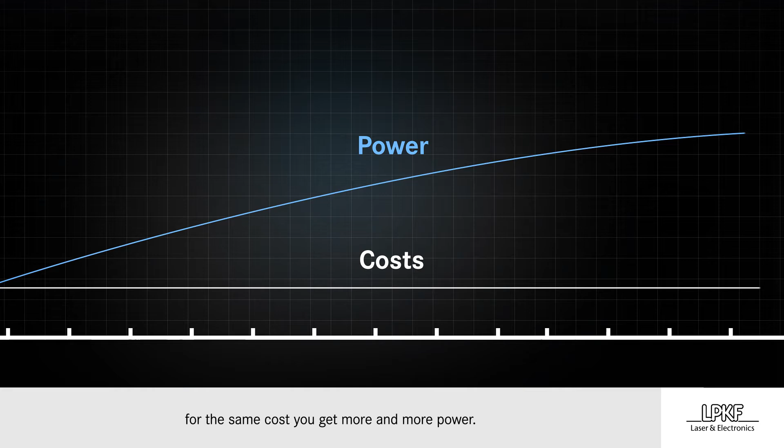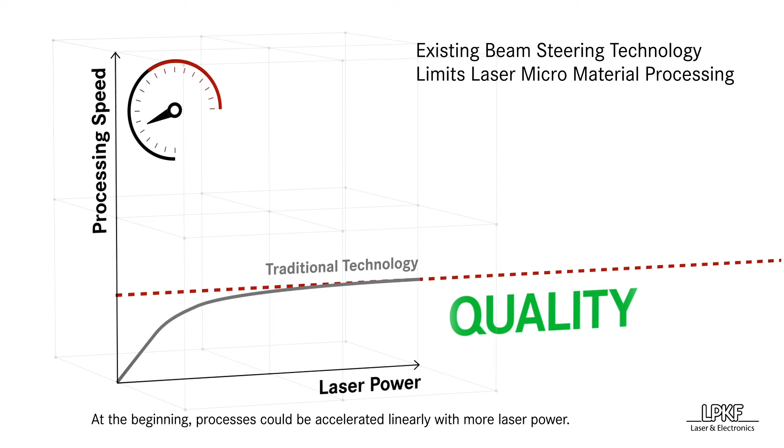Looking at the development of laser sources, we see that for the same cost you get more and more power. This is great, but the problem with more power is finding a way to use it meaningfully. At the beginning, processes could be accelerated linearly with more laser power. However, this is no longer possible without losing quality.

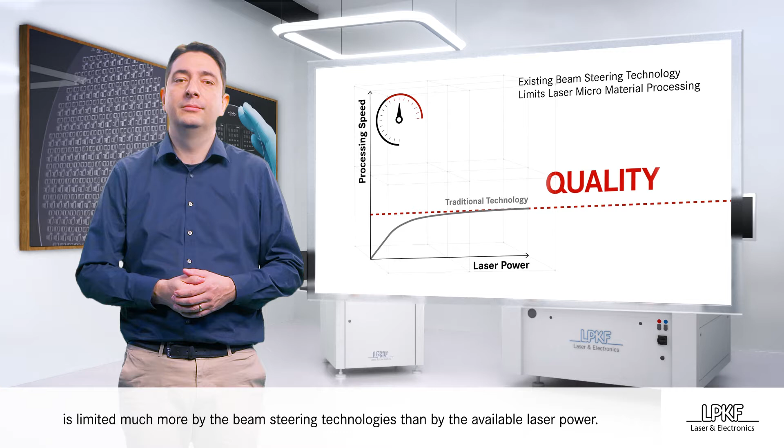We have reached a point where the actual processing speed is limited much more by the beam steering technologies than by the available laser power. This is exactly the point at which the Tensor-Technologie gets into action.

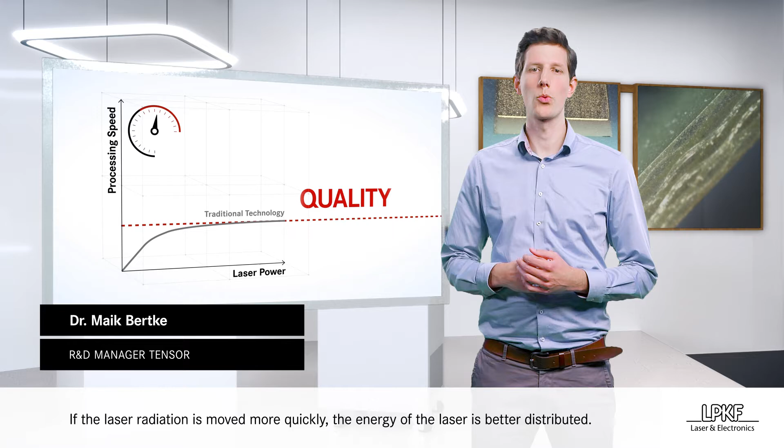The solution is relatively straightforward. If the laser radiation is moved more quickly, the energy of the laser is better distributed. Heat accumulation as well as losses in quality are less likely. In other words, you can operate with much more power before these effects occur.

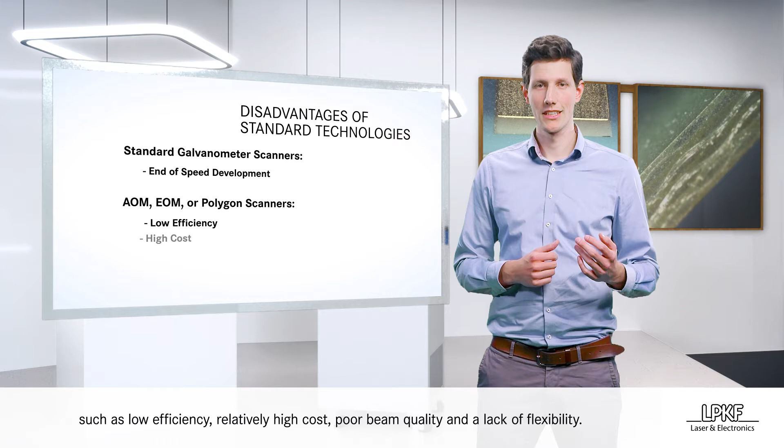However, faster beam steering is easier said than done. Standard galvanometer scanners have reached the end of their speed development. All other approaches, such as AOM, EOM and polygon scanners, are associated with considerable disadvantages, such as low efficiency, high cost, poor beam quality and a lack of flexibility.

We have long dreamed of implementing our Tensor concept. Thanks to our LIDE technology and in-house manufacturing infrastructure, this dream has finally come true. Our highly flexible development capabilities enabled the implementation of this beam steering system in record time.

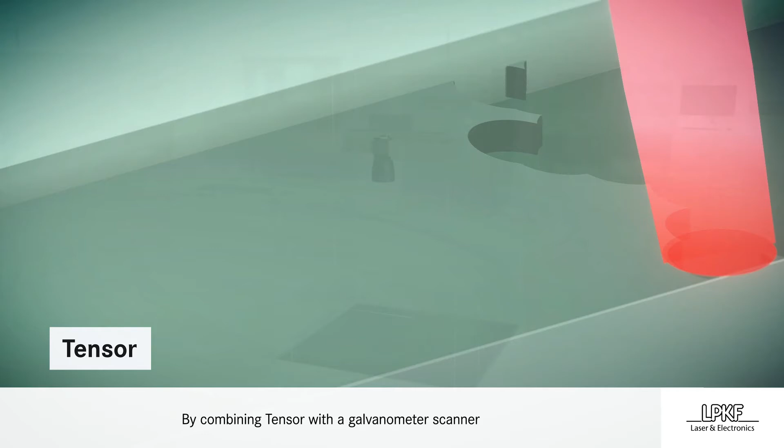Tensor overcomes the technical limitations of conventional solutions. It can be integrated very easily into different systems and adapted to various applications. By combining Tensor with the galvanometer scanner, we can achieve much higher speeds of beam steering without losing any flexibility.

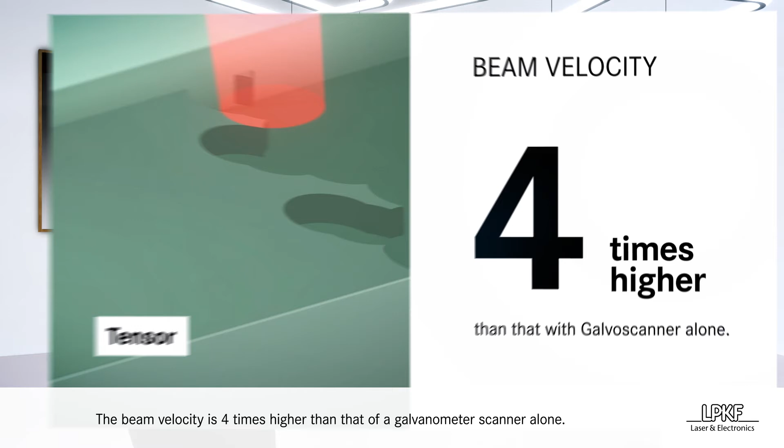The beam velocity is 4 times higher than that of a galvanometer scanner alone. Furthermore, Tensor can be used for a wide range of lasers with almost no energy losses, even for ultra-short pulse lasers.

The initial results with Tensor were remarkable and exceeded our expectations. The process time improved threefold, which could only be achieved with this technology. We are witnessing the dawn of a new era for laser micromaterial processing.

Make no mistake, the problem solved by Tensor-Technologie is everywhere in laser material processing today. This is a breakthrough innovation. Ultimately, the use cases are not limited to our current product portfolio. Nevertheless, we will of course start from there.

Ladies and gentlemen, we are incredibly proud to also launch the first LPKF laser tool with Tensor-Technologie today, the Cutting Master 2240. As the newest member of our award-winning Cutting Master series, it takes laser depaneling to a whole new level. For our customers in the SMT assembly market, the separation of PCBs from the panel is a crucial production step.

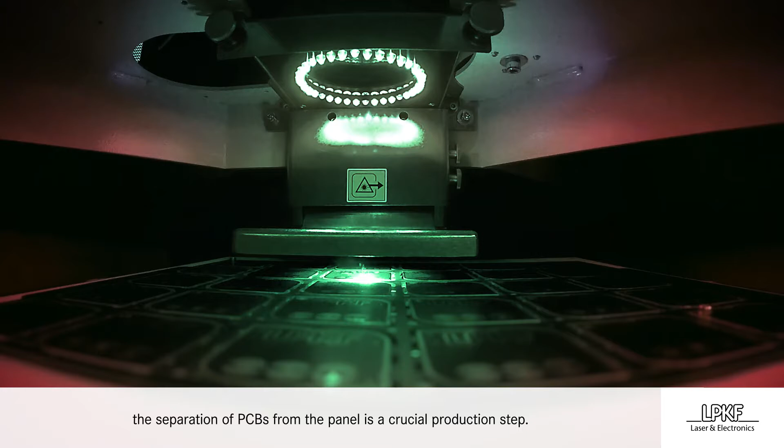Technical requirements for cleanliness, precision and flexibility are constantly rising with the growing complexity of electronic designs and miniaturization. At the same time, the system's cost-benefit ratio must hit defined economic targets and business cases for capital goods. Consequently, cost efficiency always goes hand in hand with technological innovation.

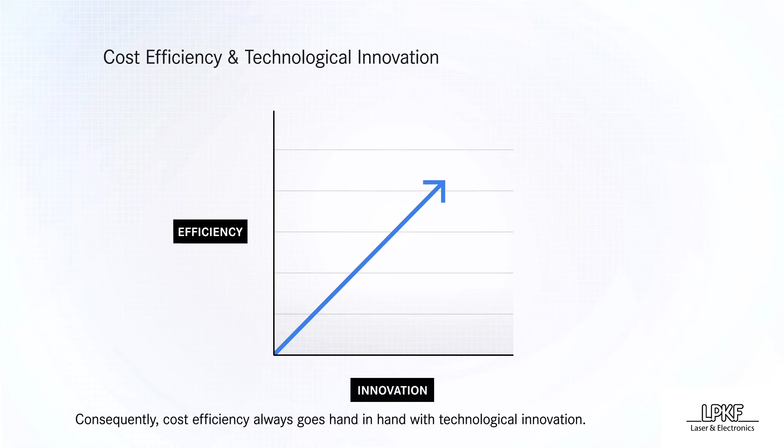Today, the technical predominance of laser-based routing compared to conventional mechanical cutting is undisputed. In recent years, we've seen constantly growing recognition for laser systems in the SMT market, for example in the automotive and medical sector, followed by other major industry verticals.

In the early days, laser cutting was considered expensive against mechanical solutions. Over the last decade, LPKF improved the price-performance ratio by a factor of 10, catching up with traditional solutions.

Today, I'm proud to announce we can put even more on top with our Cutting Master 2240 and Tensor-Technologie. This innovation will allow us to revolutionize laser depaneling in the major segments, like conventional 0.8 to 1.6 mm rigid PCBs. With increased power source and Tensor, we achieve 4 times faster cutting speed compared to our predecessor. By this increase in processing performance, customers will benefit from improved energy efficiency, supporting the reduction of their carbon footprint.

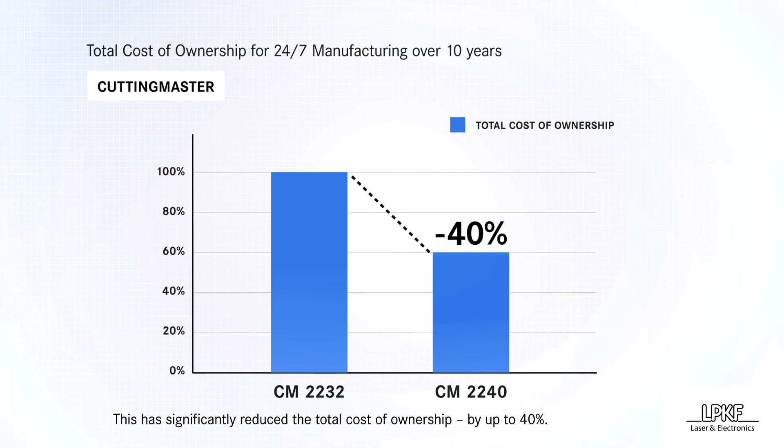For the new Cutting Master 2240, we equip our most compact laser depaneling system with the most powerful laser source we've ever used for this application. Compared to previous models, the laser power has been increased by 25% to 40 watts. With the design based on industry-proven LPKF laser sources, we further improve durability and robustness at even higher power levels. This has significantly reduced the total cost of ownership by up to 40%.

To allow our customers to fully benefit from this extra power, we have installed our breakthrough Tensor-Technologie in the Cutting Master 2240, setting new standards for the technical clean cutting of rigid PCBs. We can see a reduction of cycle times by up to 70%.

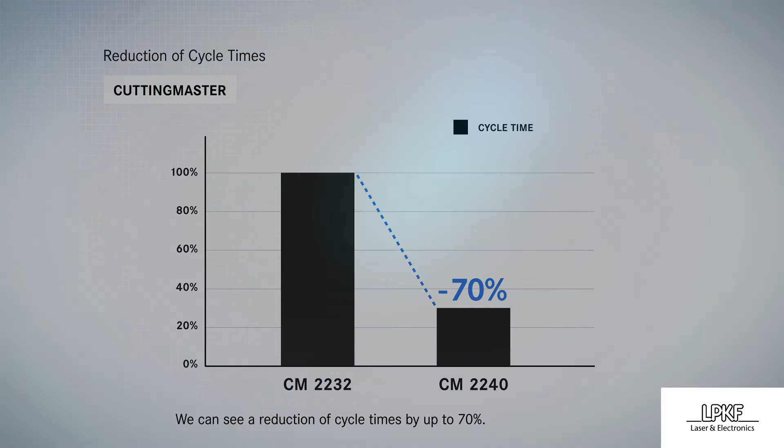Tensor-Technologie is a game changer for micromaterial processing: 10 times faster beam velocity, almost no energy loss, transforming all the laser power into higher productivity and quality. LPKF enables innovation.